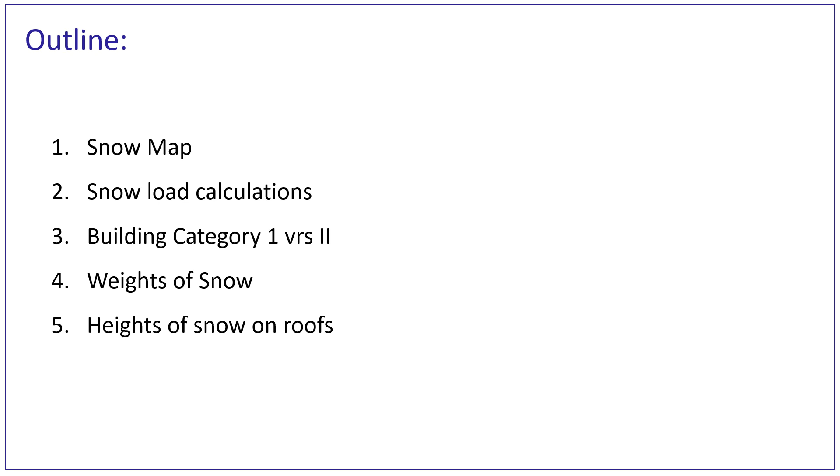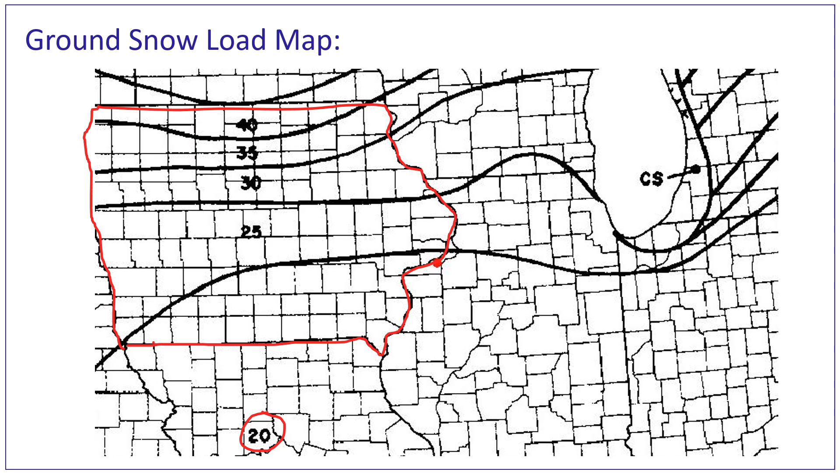One of the first steps in calculating out the snow load required on roofs is to convert the ground snow load from the map to a flat roof snow load as shown in this equation. P sub F, flat roof snow load, equals P sub G, the ground snow load from the map, times 0.7, a factor built into the equation, times C sub E, exposure factor, typically 0.9 or 1, times C sub T, the thermal factor, typically 1 or 1.1, times I, the importance factor, typically 0.8 or 1.

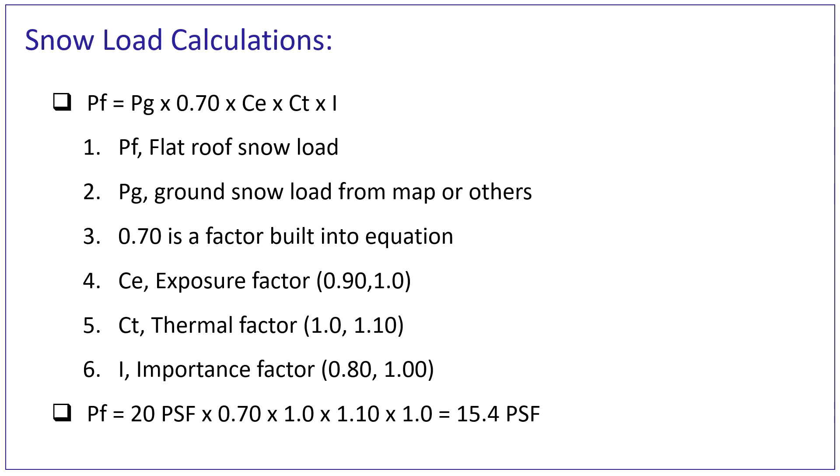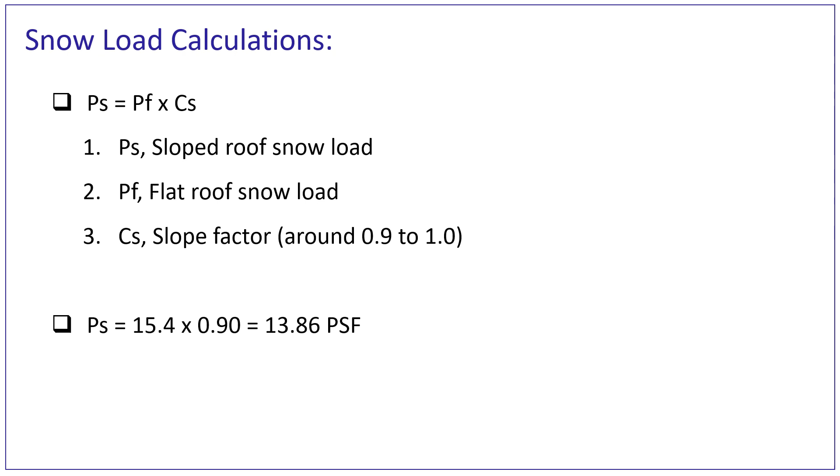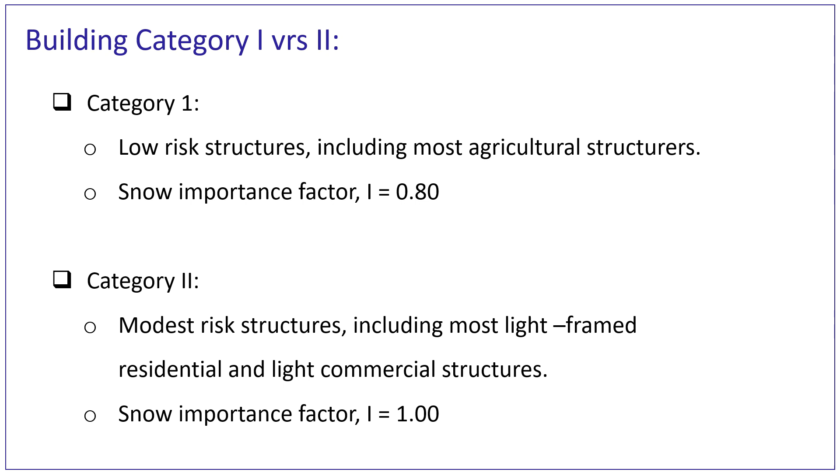The building category determines the importance factor used in the snow load calculations. A Category 1 is a low-risk structure which typically includes most ag buildings. A snow load importance factor would be 0.80. Category 2 is a modest risk structure which includes residential and most light-framed commercial buildings. This importance factor would be 1.0 for the snow load equations.

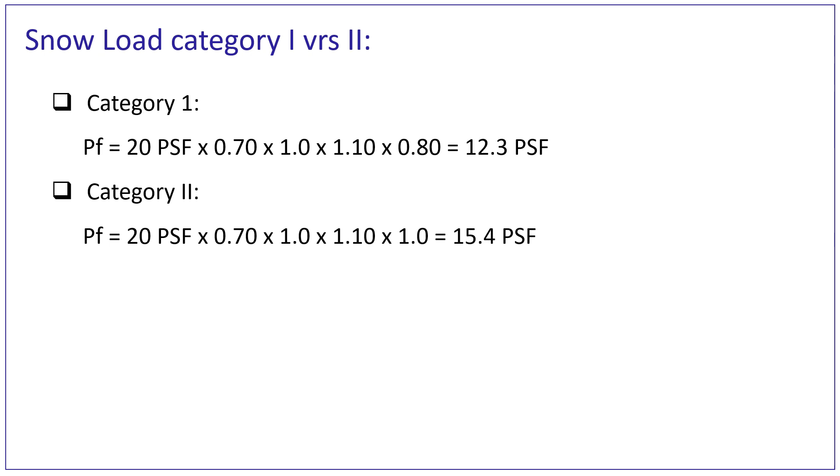The equations above show the difference between the base flat roof snow load for a Category 1 versus a Category 2 building. Please note that these are just base snow load calculations and other factors can affect the snow loads on the structure. Minimum snow load requirements and rain on snow can affect these numbers.

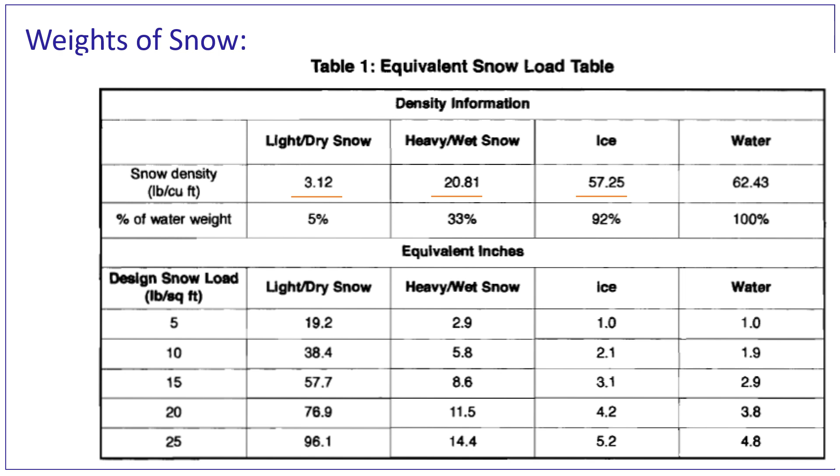If we assume a design load of 30 pounds per square foot was used, a light and fluffy snow could be as high as 9 feet before exceeding the design load. A heavy wet snow would only be 1.4 feet tall before hitting the design load. Keep in mind, if it's all ice, the height would be around 6 inches. Note, you will not know how heavy the snow is on your particular roof or how much ice is included. Also, you may not know of any possible construction defects that could affect the capacity of the structure.

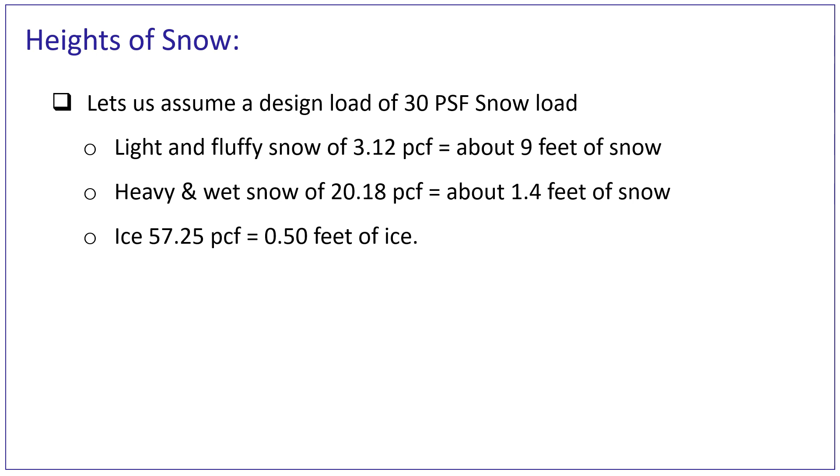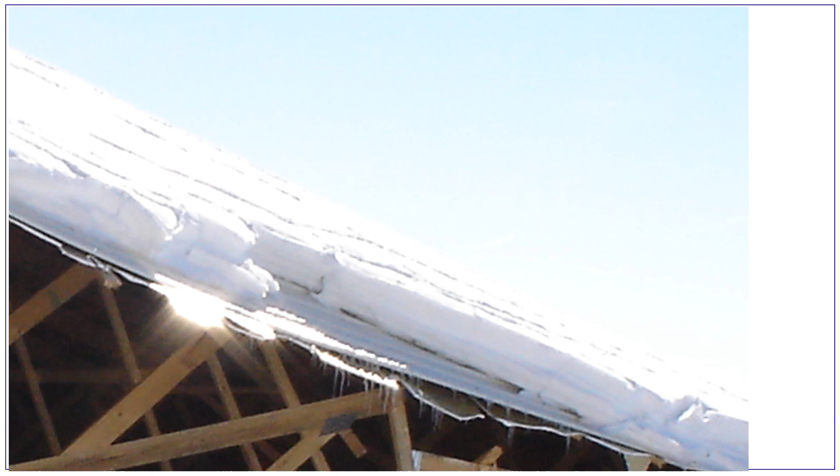In summary, the weight of snow can vary greatly. If installed and braced properly, trusses should be able to support 1.4 feet of heavy snow when designed with 30 pounds per square foot. Inspecting the roof structure and snow depth might be advised, and removal of snow and ice if needed.